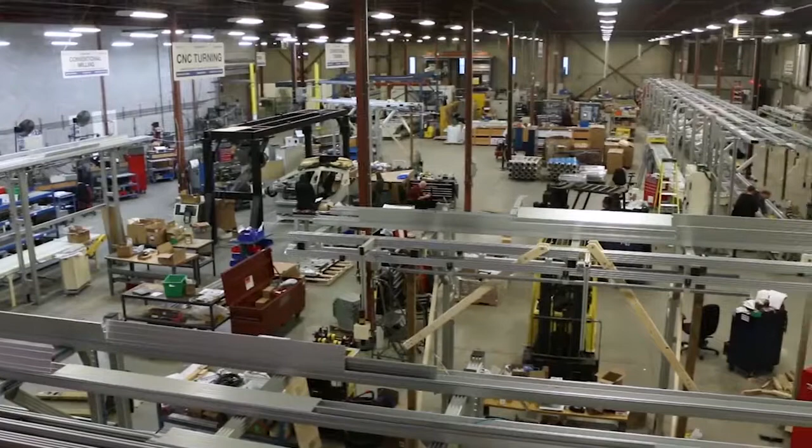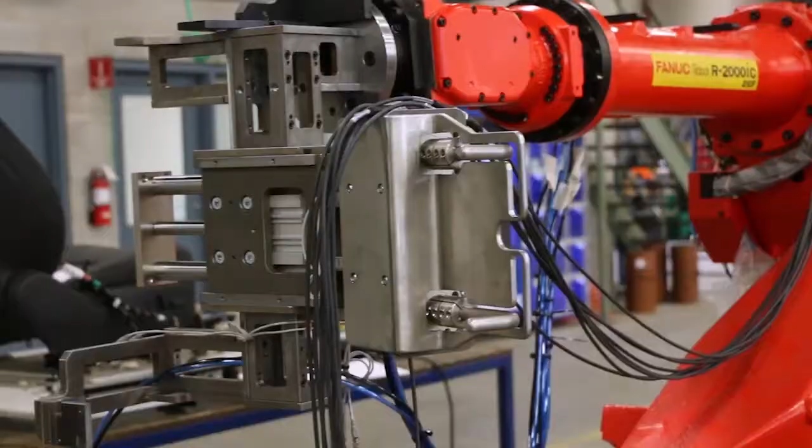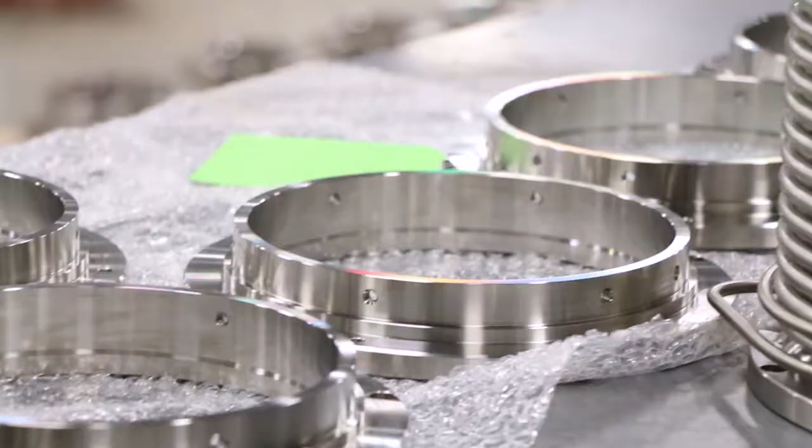A brief history of Promation: started off in automotive back in the owner's basement, Mark's basement, back in '95, and was strictly in automotive up until 2007. Then the automotive industry started to taper off, but at the same time nuclear refurbishment started to pick up. Nuclear was traditionally a slow, cumbersome, expensive industry, so for companies like us that were nimble, quick, customer-focused, responsive, schedule-conscious, and budget-conscious, it was very refreshing to the nuclear industry. It was a great opportunity for us.

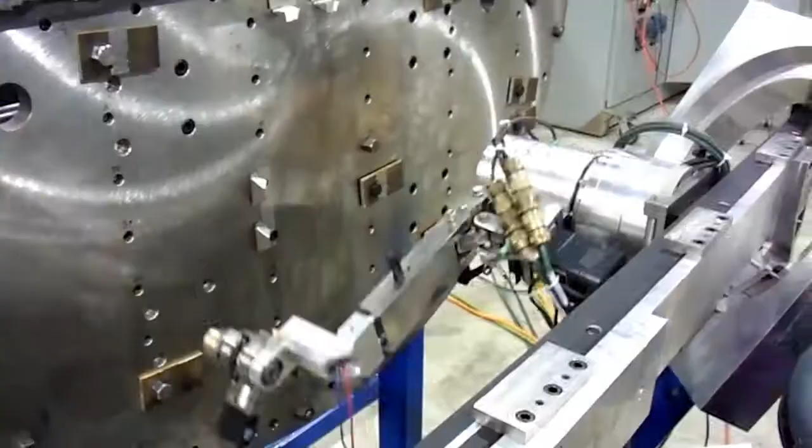More recently, in the past 5 years, automotive has really picked right back up - automotive and automation in general, general packaging and so on - but nuclear's continued to grow, so we've firmly established ourselves in that environment. Now we're in our 23rd year.

We essentially have the coolest job in the entire world. We design robots that go into nuclear reactors that perform tasks that are not safe for human beings to do.

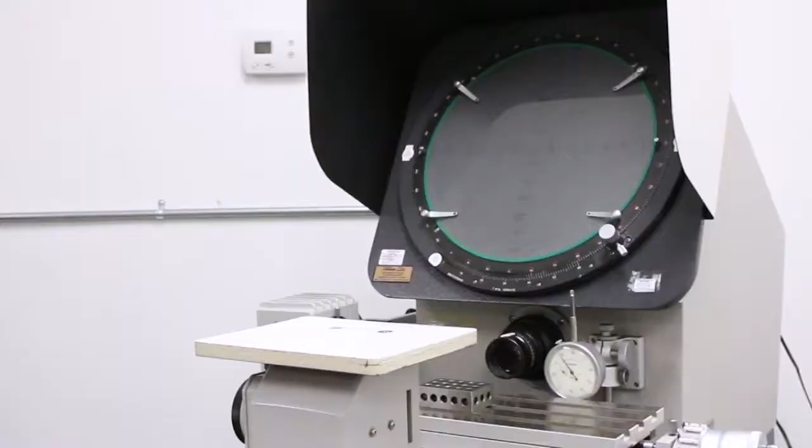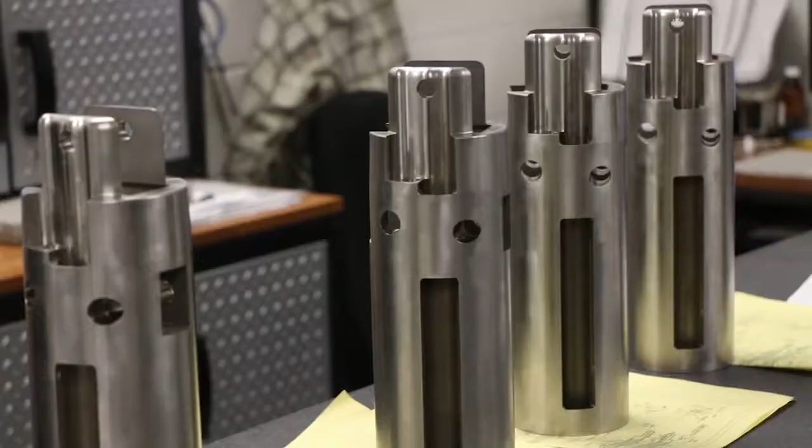The reason why we can do nuclear work is because of our quality programs. That's the reality, and I don't know how many companies in Ontario have those quality programs, but my perception is that there's not a lot. It's not like ISO, which is generic and everybody has it. Once you start getting into the 299.1, 299.2, 3 and 4, we have all of them, plus the pressure boundary, suddenly there's not a lot of companies that can do the work.

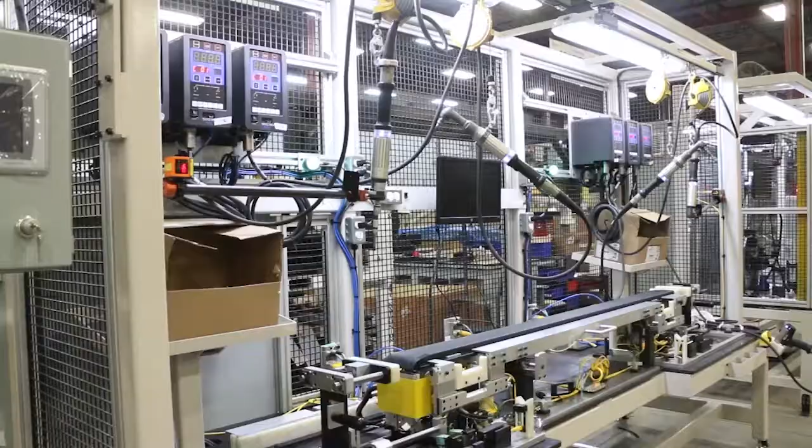This outlines what you need to do to control the quality. Because of that breadth and diversity, at any given time we're quoting dozens of jobs, and we're actively working on anywhere between 1 and 2 dozen jobs at any given time.

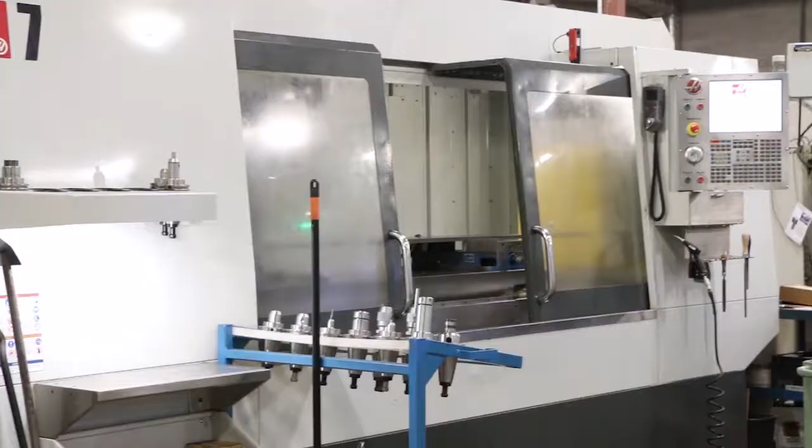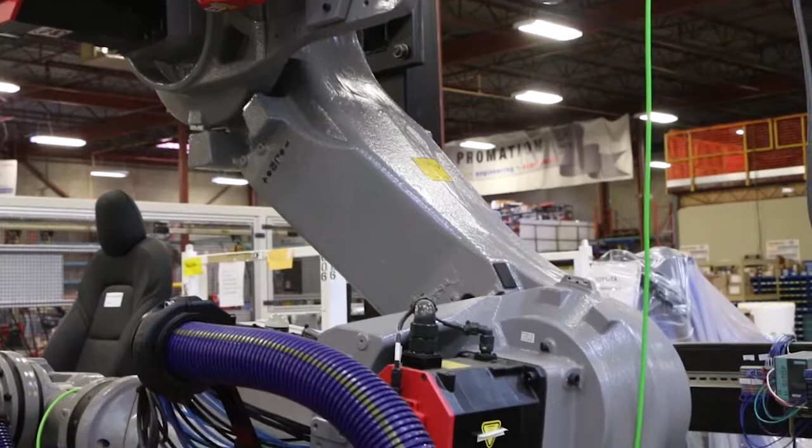This is a really good initiative because if you ask anybody how things are made, and you don't watch it on the Learning Channel or whatever, you simply don't know. So we actually design and build the machines and equipment and robots to make stuff. The great thing is, if you can't actually come here and see firsthand - because quite often when else would you have an opportunity to go into a manufacturing production facility - this is the next best thing.

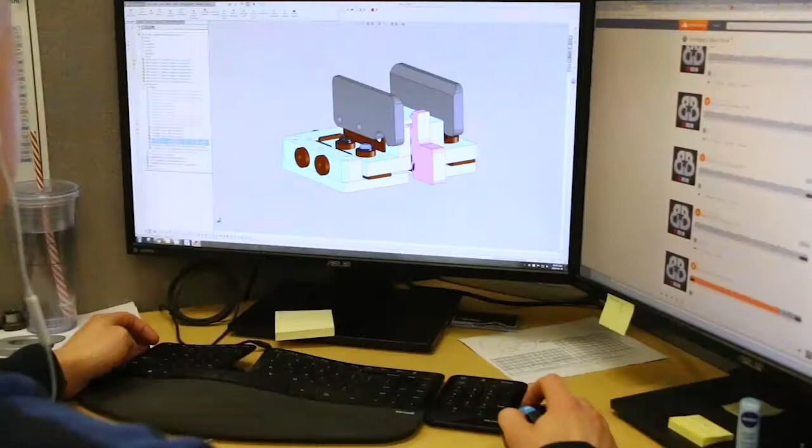What they'll see is a mix of office environments, like the traditional white-collar workers, and the traditional workers in accounting, administration, HR, things like that, as well as the actual designers who are working at the desks using computers to design things. Then on the shop floor, they'll see a myriad of skilled tradespeople.

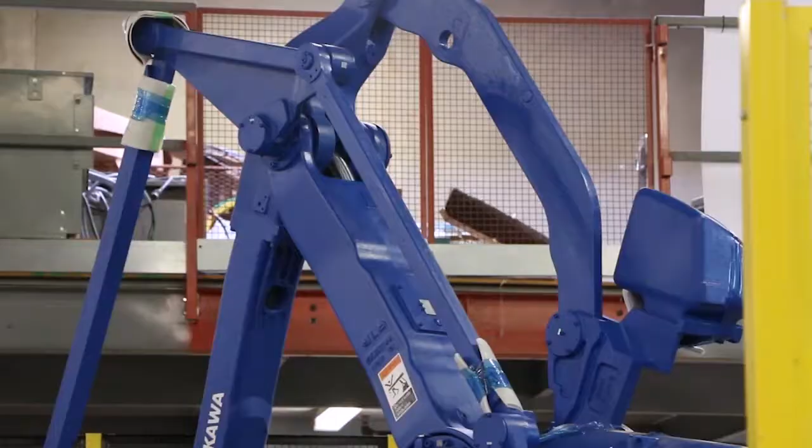What I say is we're building a lot of neat stuff. We've got robots on the floor, automated machinery, guys machining stuff, sometimes welding going on. The way I describe it for some of the younger kids, it's almost like building Lego from scratch.

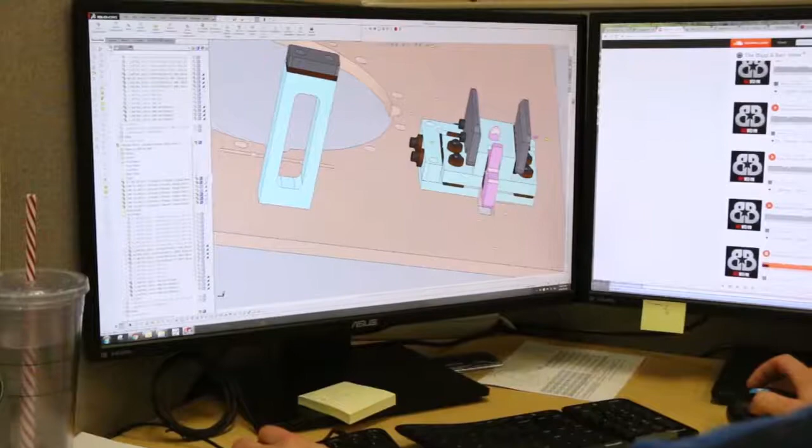You've got the guys who are quoting the customer, and the customer says, I need a Lego kit, and it needs to do this. So then you start from scratch saying, okay, now we need to make this Lego kit, and we need to design what this Lego kit looks like. The guys in the computer will design all the Lego pieces and put it all together from the mechanical side, and if it needs to move, you have the electrical guys doing all of the motors and the wires and all that kind of stuff.

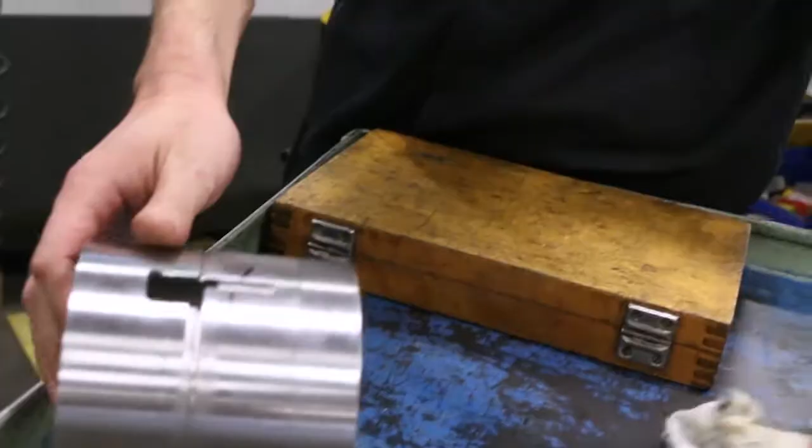Then they've got to basically custom make all of their own Lego pieces, so the drawings go to the machine shop, and they've got to buy the material and machine all the little pieces that make up their own Lego pieces. Then they've got to buy all the other bits, like the gears and the axles and the shafts and so on.

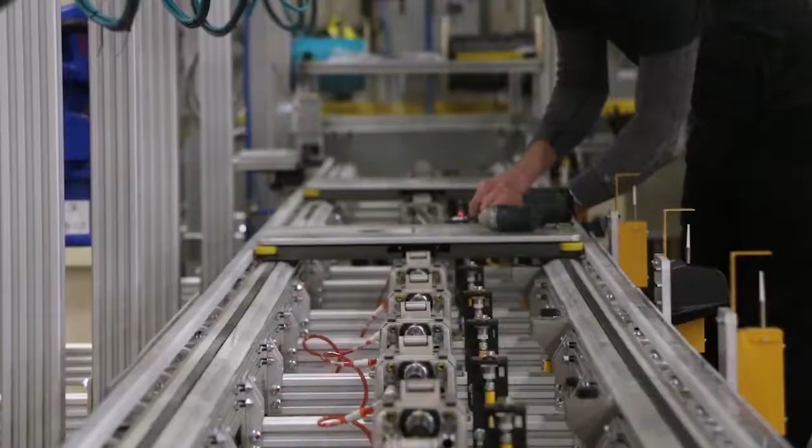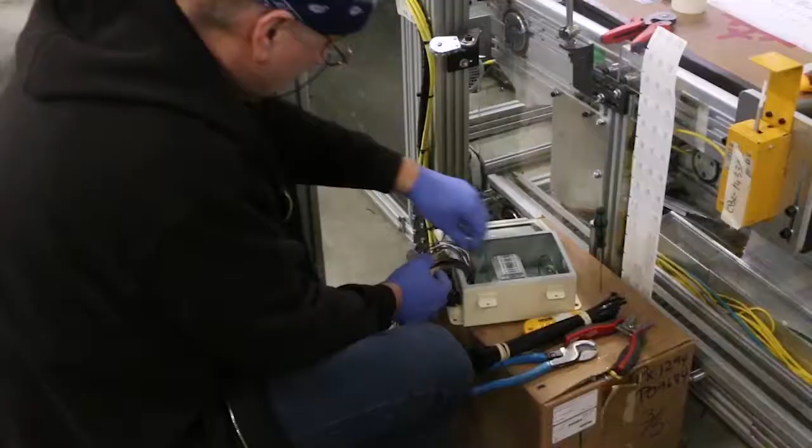And then they've got to put all that into a Lego box. The designers make the instructions and say, okay, here's the instructions and here's the pieces. Then they have to give it to the assembly guy, who has to put together the pieces we made and bought, like the instructions said. Then the electrical guy comes in and says, now it needs to move, like the instructions say. They wire it up, build the brains of the whole thing, put it all together, and eventually push the power button and the whole thing starts to move. It's not unlike those robotic Lego kits you get. It's just, I think, a lot neater.

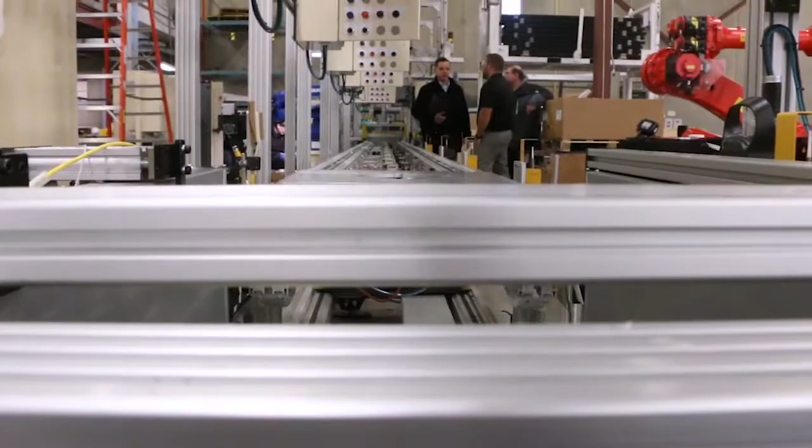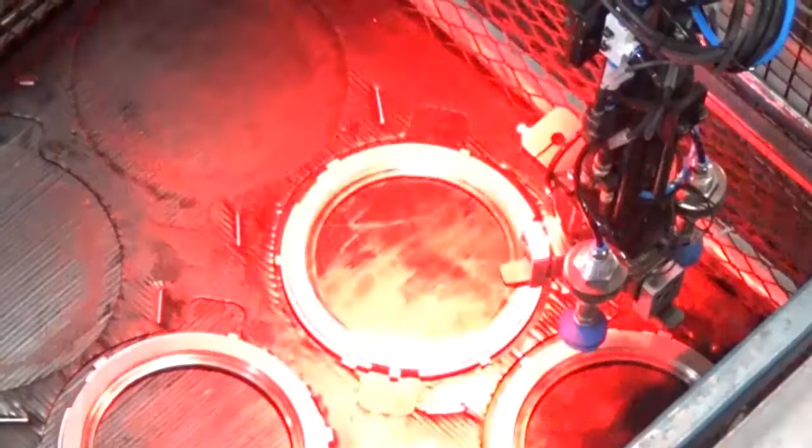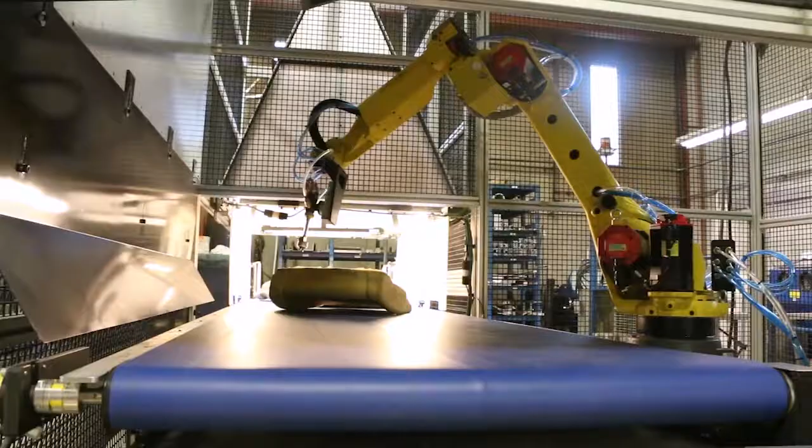We deliver turnkey automated systems to the automotive industry, as well as the food, pharmaceutical, and medical industries. Vision-guided robots in new technology companies or new automotive companies - everything's vision, everything's robots, operators don't touch stuff. Now we're taking that technology and putting it into other industries: food, cosmetics, pharmaceutical, consumer goods, where those companies literally work on a workforce that's all hands-on. They're not used to that robotic end. So we can go into those companies and say, we can do everything from the beginning to the end.

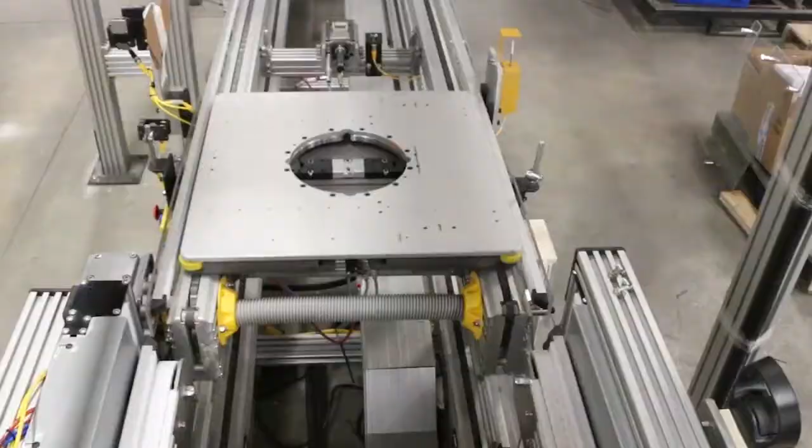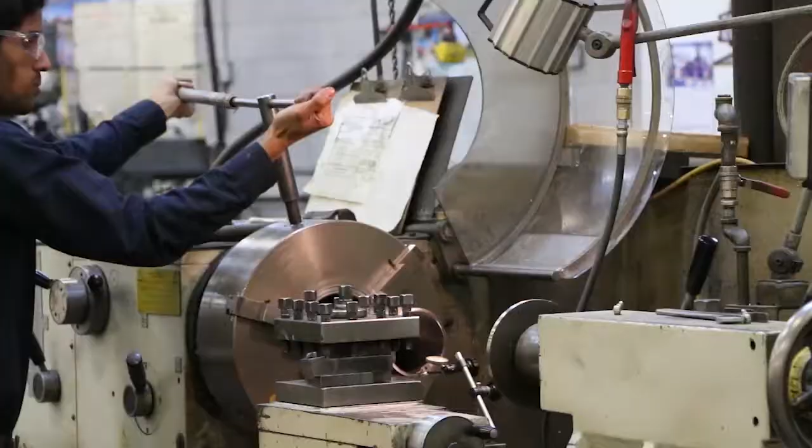At Promation, we're an engineering firm that builds equipment for the requirement. It's just like any other machine out there - function dictates design. You need to make sure that whatever you're providing, the customer could come to us for a little tooling package, and that is the most important thing to that customer at that time. And it has to be the most important thing to us as an organization. Some people might just say that's tooling, but that's a solution for his problem, and that's how you address his manufacturing challenge by providing a solution.

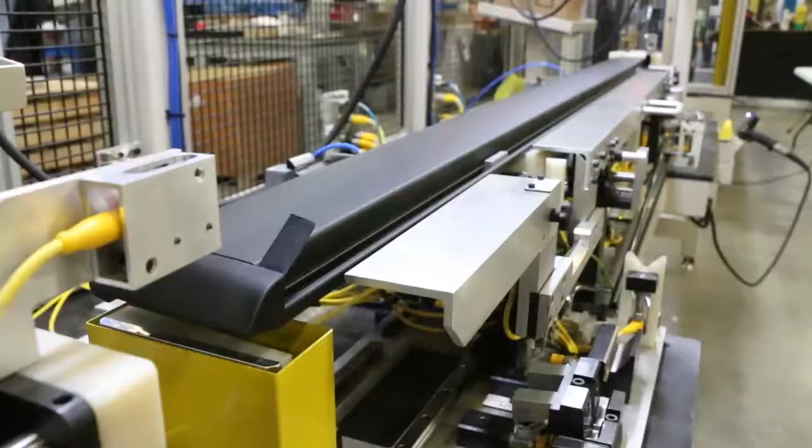We could do something as small as a tooling kit, or a multi-million-dollar line with multiple robots. Even scale it back to just operator enhanced automation. With the way things are changing with minimum wage right now, labor concerns, even being able to staff is a huge issue for people because everything's so busy with where we are in Ontario and what's going on in manufacturing. So with operator enhanced automation, if we can get from 4 operators to 1 operator doing that task, and repurpose those 3 resources elsewhere in the plant for other functions, that's a huge return and a solution for that customer.

I think especially at Promation, because we manufacture manufacturing systems, because we work so intimately with robotics, that's what's really exciting - we're getting all these new technologies that are being developed in schools.

At its core, a robot is really just some sort of machine that does a task. There's kind of 3 facets to that. It's got to do something useful, so it has to be able to perform the task. It also has to have some level of autonomy - it's got to be able to do something by itself. We can't hold its hand while it's doing something, otherwise it's not useful. And then there's always some sort of sensing and decision-making aspect involved.

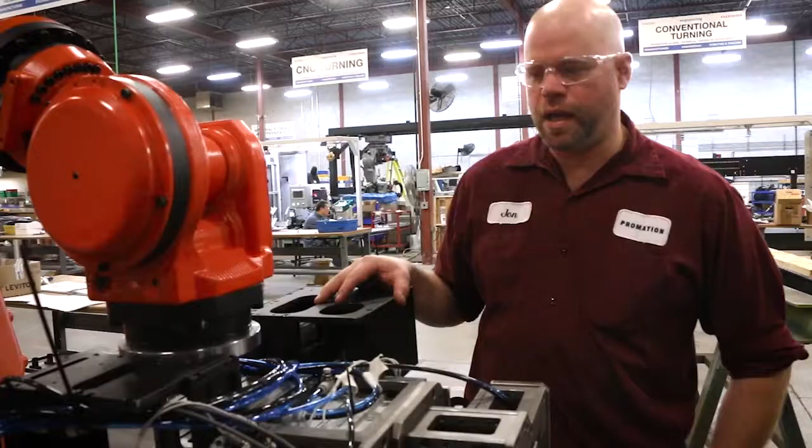I'm part of the manufacturing process for building and assembling tooling for Promation here. It's like building Lego, pretty much, so it's a fun way of building things. When I was a kid, I built Lego, and now I'm building things in real life like Lego, but actual machinery and automated machinery.

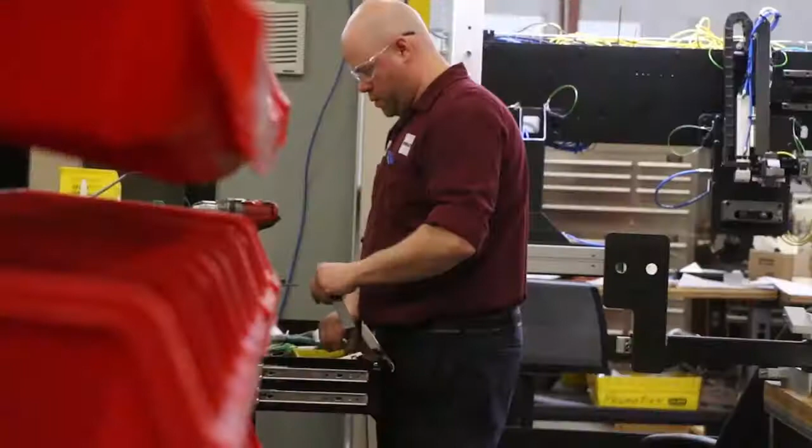It's really cool - through the project manager and the coordinators coming together with the designers, they bring out the package to us. Everything's machined basically in-house or outside. We get the drawing, the assembly drawing, and we put it all together, pneumatically, electrically, mechanically.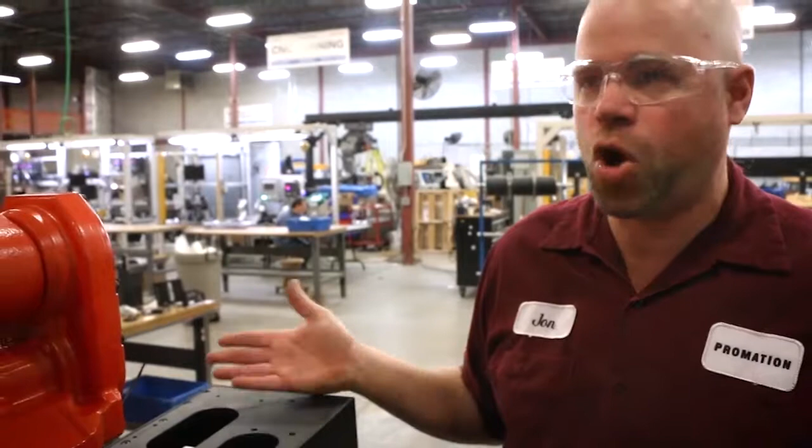And we put it all together according to the specs of the customer and our design team. If you like assembling things like Legos back when you were younger, then this is what you want to do, what you want to be in. You want to assemble things with your hands, problem solving, because there's a lot of problem solving.

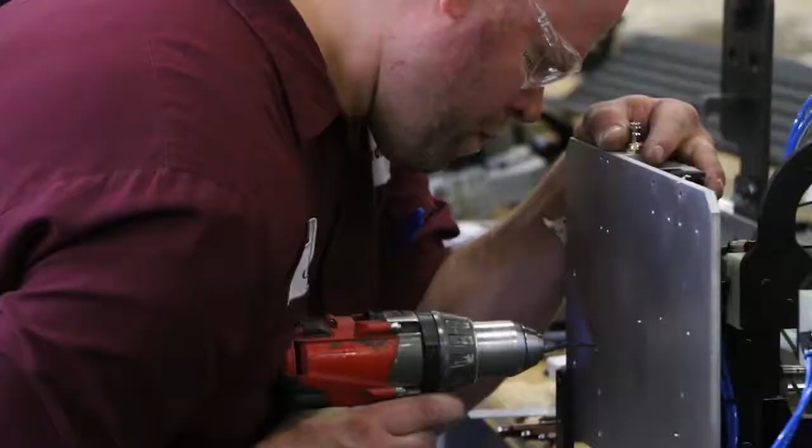This job allows you to travel, see the world. I've visited Russia, Brazil, continental America, a lot of states, Germany, Austria. You get to work with a whole bunch of different people from different countries, different skill sets. You learn a lot of different skills from different plants and operations, because you've got to know almost all the mechanical applications to do this stuff.

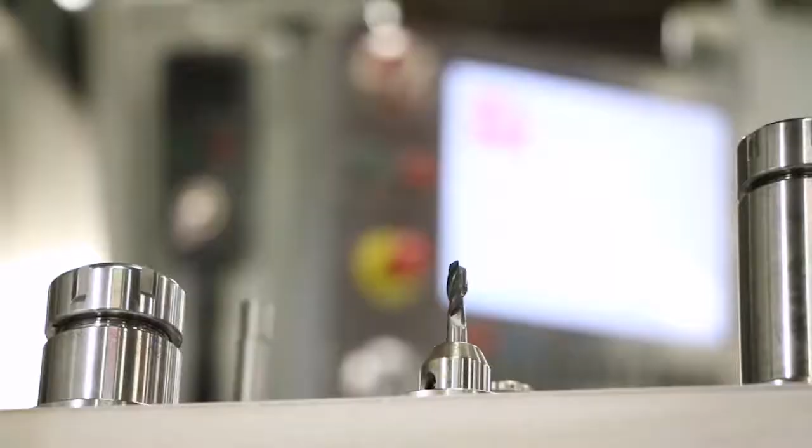It's a really cool process, I like doing it. I came to Promation about 3 years ago. I came here actually on a program that was training people to use CNC machines, so that's where I started off. I used a whole bunch of CNCs, CNC lathes, mills, and I actually gravitated more towards manual machines because it's more satisfying.

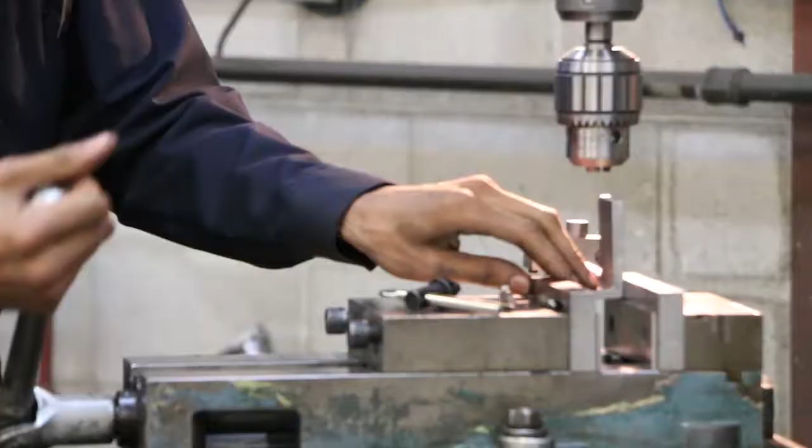I felt like I was actually using my hands more as opposed to pushing a button, setting something up, and I guess that's what I liked more. I liked that aspect of using your hands more, and it felt like I was doing more actual critical thinking as well. When I'm doing something, I often get to see what happens with it.

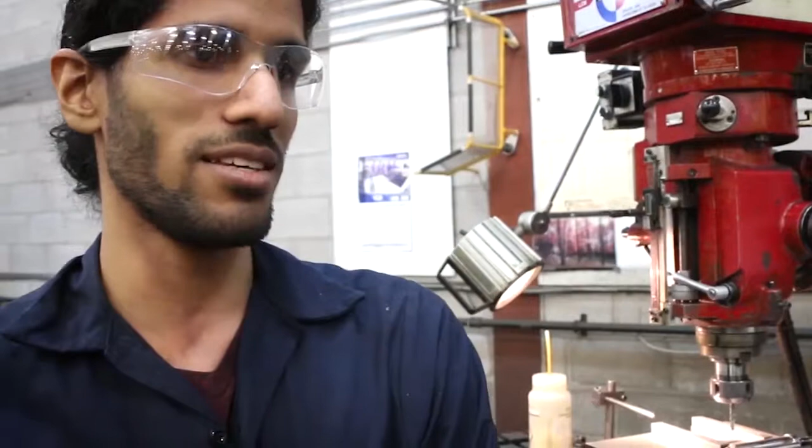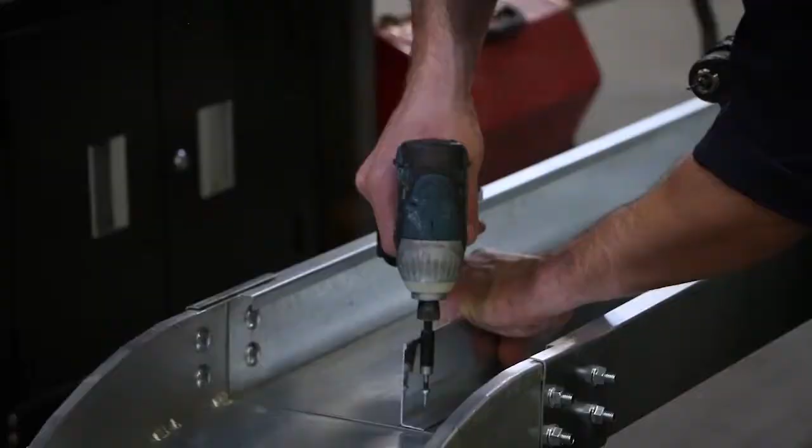It's not just like some shops where you machine parts and they go out the door in a truck and that's it, you don't know what you're doing. Here I make parts and we actually see them assembled, and we see what the next process is. So I'll make parts and then I'll actually see these guys put them together, and sometimes if they need help, I'll help them put it together and see the parts I've made going to do something.

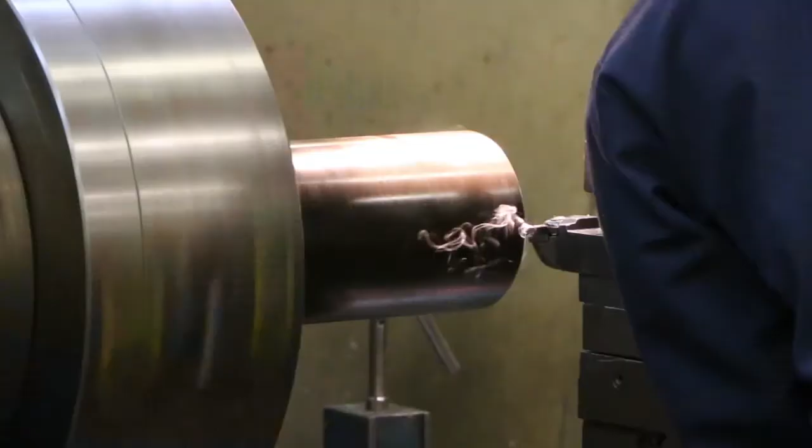I went to college for things that are completely different. I studied a bit of law and I realized very quickly that office work is not for me. In all the hobbies and things that I do, I realized I like using my hands, and I thought, why can't I just mix those things? Why can't I work with my hands and have that be part of my career as well?

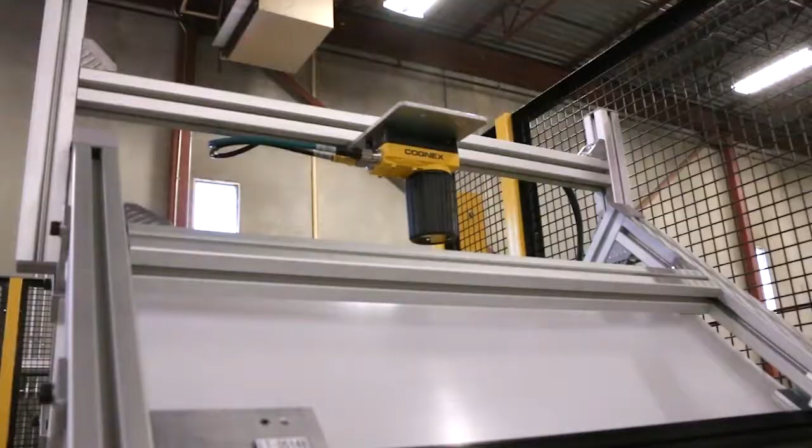Manufacturing to the economy of any major nation is important, and the people that can help achieve that are also important. Now with the advent of technology, Internet of Things, automation and so on, that hasn't changed. The only thing that's changed is the ability to innovate and adapt.

So there's even more of a burden now for kids, students, or young adults moving into manufacturing, to not only know the skilled trade portion, but also know the technology behind it, the computers, the robotics, understanding how to use cloud data, machine learning, and artificial intelligence to make that more intelligent.

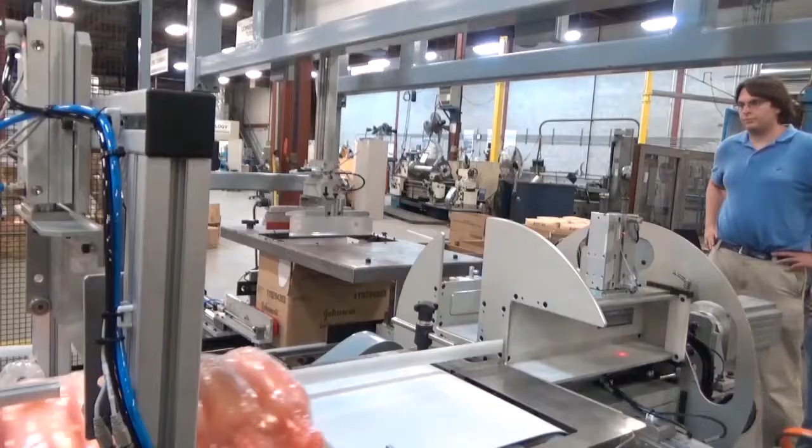There's this fear that automation is going to take jobs away, but actually the opposite is true, because we're going to need more efficient manufacturing - we can't keep producing the same way we're producing things. We can't have the waste, the environment can't take it. We need energy efficiency, material efficiency, labor efficiency, and so on, because we need this green economy, and the green economy requires us to be innovative on the total life cycle of things, and everyone has a role to play in that. So it's not that jobs are necessarily being taken away, it's that the jobs are evolving.

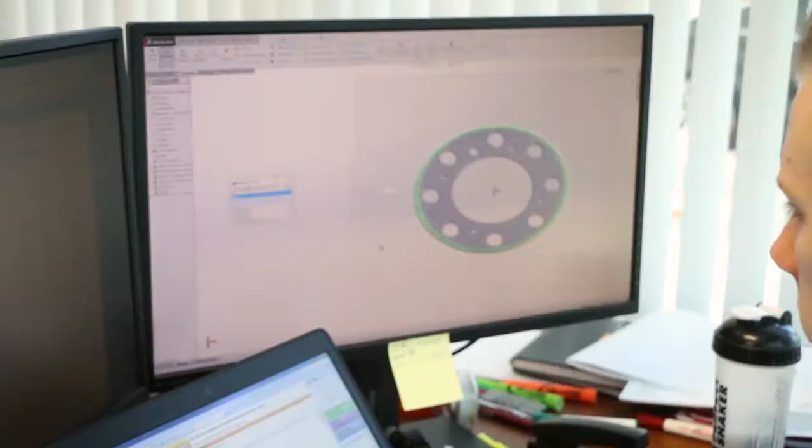It's putting more of a demand on prospective employees to bring with them the best of what they understand from their own generational experiences of current ways of behaving with technology, and traditional manufacturing technologies and techniques. That's what our generation is going to need - that next generation to bring that in, because frankly they're growing up in it, whereas we need to learn it.